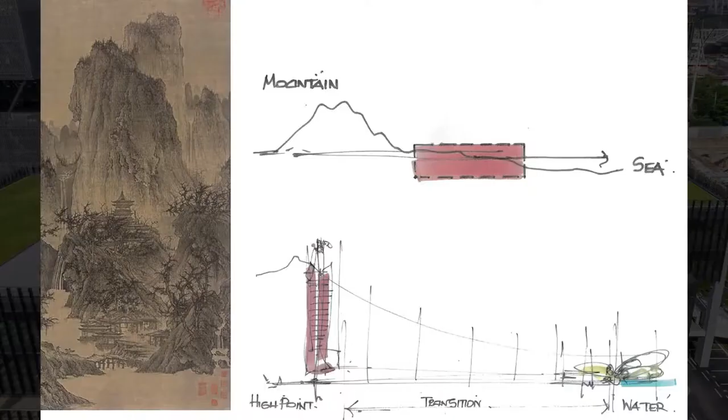The Guangdong-Hong Kong-Macao Youth Entrepreneurship Zone project is an important initiative of Qianhai to implement the national strategic deployment and promote innovation and entrepreneurship of youth in the Greater Bay Area. It is tasked with the historical mission of building the first industry-focused Shenzhen-Hong Kong science and innovation cooperation carrier in Qianhai, and a youth science and innovation platform with global influence in the Greater Bay Area.

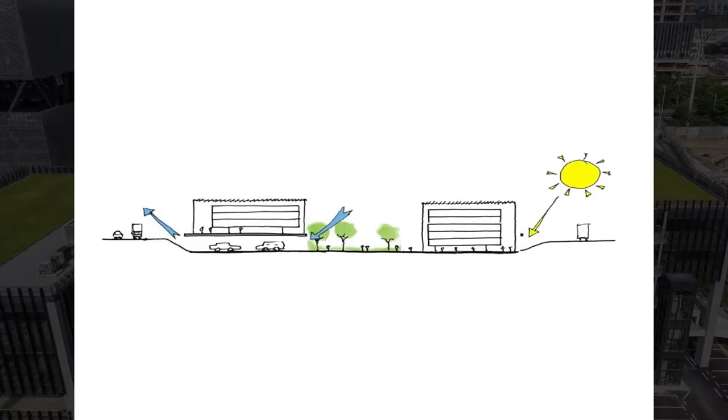The project is invested and operated by Qianhai Services Group Co. Ltd., and focuses on artificial intelligence, big data, life and health, Internet of Things (IoT), blockchain, cloud computing, science, technology, and culture, etc.

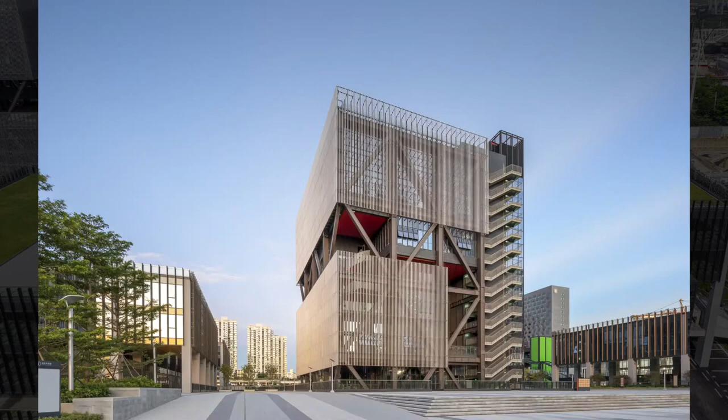It is an important initiative for Qianhai to implement the requirements of the outline of the development plan of Guangdong-Hong Kong-Macao Greater Bay Area on expanding the innovation and entrepreneurship space for young people in Hong Kong and Macau, and to help Shenzhen achieve the development goal of building an innovative and creative capital with global influence, as stated in the opinions of the Central Committee of the Communist Party of China and the State Council on supporting Shenzhen to build an advanced demonstration zone of socialism with Chinese characteristics.

The coastal park creates a transition space from land to sea, while the City Hall is an essential element of life in the modern metropolis. Cultural facilities are arranged in the area stretching along the City Hall to guide people from the land to the coast, opening the prelude to metropolis life.

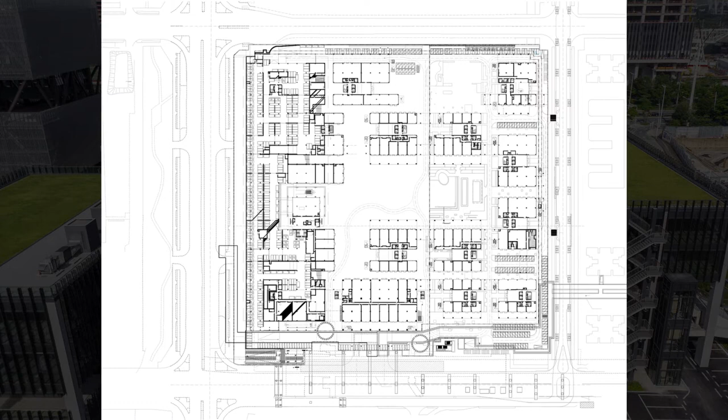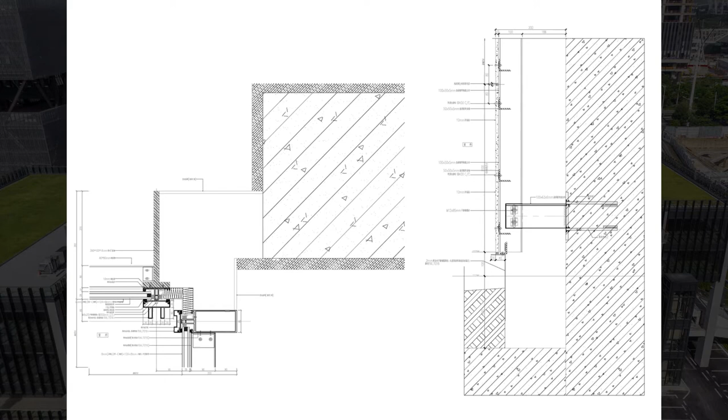As an important connection node of the City Hall, the architects of the Guangdong-Hong Kong-Macao Youth Entrepreneurial Zone would like to shape a conception of traditional Chinese landscape painting with an open and diversified attitude, so that the mountains, land, and flowing water can be intertwined with each other naturally and harmoniously, to drive the vitality of the City Hall.

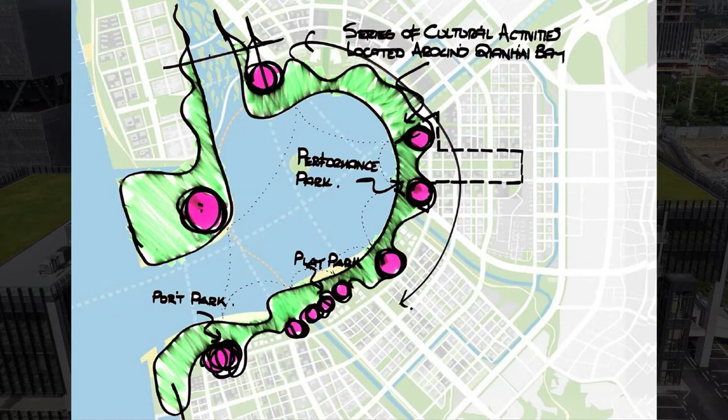The zone draws inspiration from the planning of Chang'an City in the Tang Dynasty, and proposes a new, open-ended Lifang system neighborhood model, emphasizing a permeable axis relationship, while refining the layout of South China traditional gardens, with buildings grouped around a large garden, and spaces within the garden interspersed like small neighborhoods. The whole zone is like a modern interpretation of South China traditional gardens.

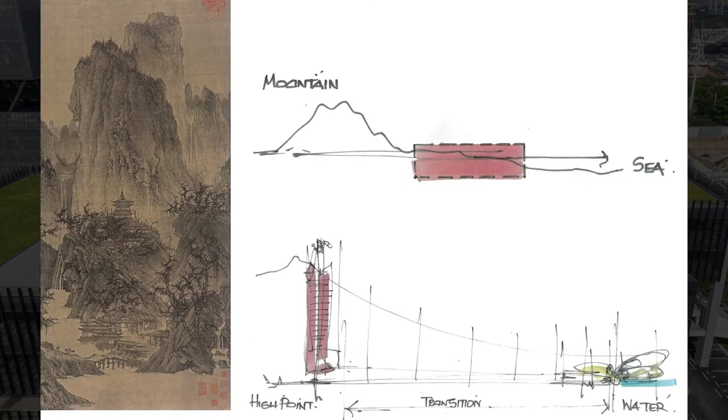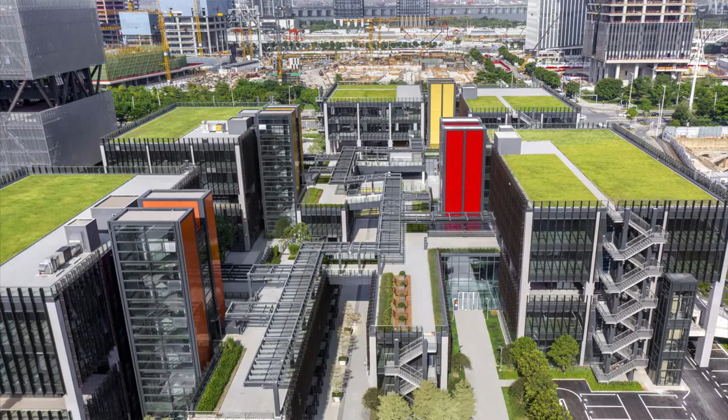The surface-air-underground, multi-level pedestrian system is closely integrated with the green system, linking the whole zone. The pedestrian system of the zone is nested in the multi-level pedestrian system in Qianhai, becoming an important node of the city's green pedestrian system. The whole zone is highly open and shared.

The corridor can be strolled and offers views of the high-quality landscape of the zone. The elevated leisure area is set on the third floor of each building, providing a multifaceted space for office workers to rest, communicate and share, and the air walkway can be reached by stepping outside, which is also work and life.

The project is a 15-year leasehold site. In order to meet the requirements of green and friendly development, the project adopts an assembly-type construction method with the strategy of sustainable development of the whole building cycle.

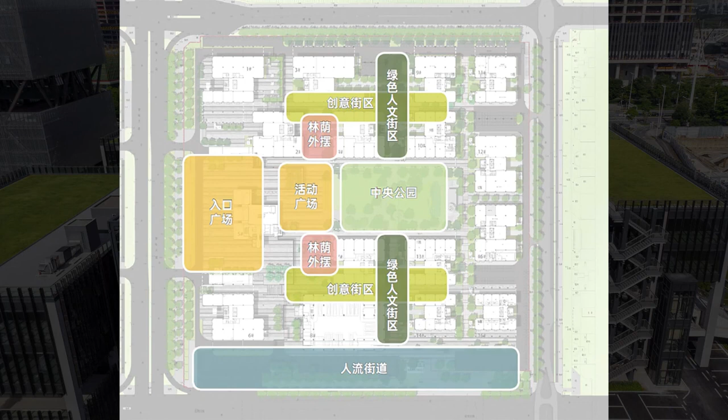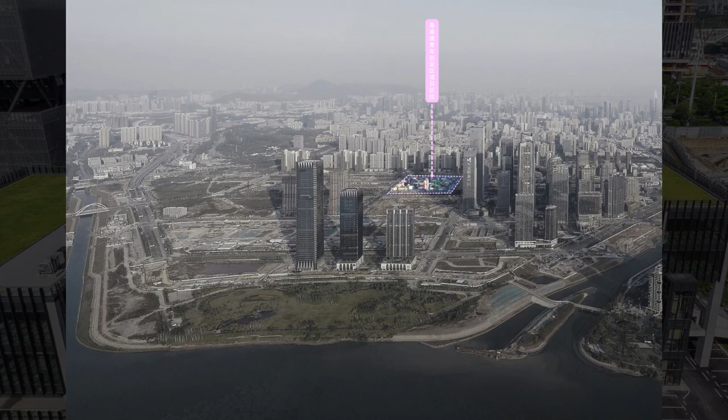The main structure is designed as a steel structure, and the high-tech architectural style echoes the theme of youth entrepreneurship and the operational characteristics of the zone. At the same time, the design elements are extracted from South China traditional architecture, such as arcade, corridor, and water garden, to regulate the microclimate of the park and realize a green and eco-friendly, energy-saving park.